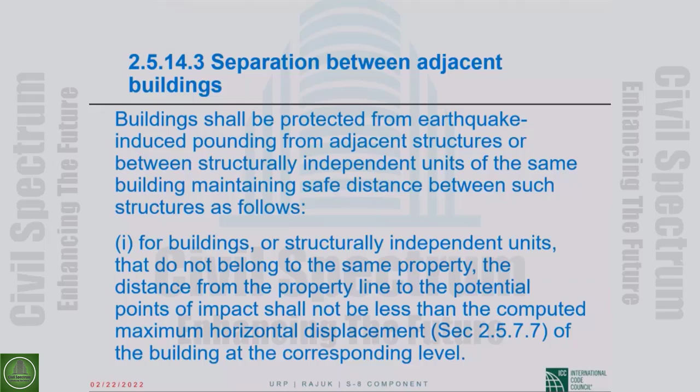The second item: for buildings or structurally independent units belonging to the same property, if the distance between them is not less than the square root of the sum of the squares of the computed maximum horizontal displacements of the two buildings or units at the corresponding level.

So this is exactly the same as ASCE 7-10. Separation distance is the square root of the sum of the squares of the deflection at the roof level of the shorter building and the deflection at the corresponding level of the taller building.

Now, this square root of the sum of the squares concept is in BNBC ahead of ASCE 7-10. I wanted you to see that. And once again, we are not talking about delta sub M1 of ASCE 7, including torsion. This is just the horizontal displacement. It may not include torsion.

Then there is what I found most interesting, and the reason I thought I had to show all of this to you, is item number 3. If the floor elevations of the building or independent unit under design are the same as those of the adjacent building or unit - please let me read that again - if the floor elevations of the building or independent unit under design are the same as those of the adjacent building or unit, the above referred minimum distance may be reduced by a factor of 0.7.

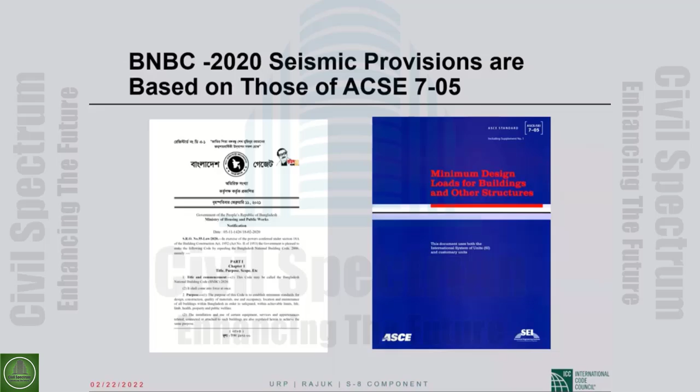Okay, so the documents in the background of our discussion are BNBC 2020, the seismic provisions of which are based on those of ASCE 7-05. You have heard this many times. Those are still in the background. Today, I do not know that I will need to go too many times to ASCE 7-10. But let's see, okay.

As I mentioned already, the non-structural components are in chapter 13, and non-building structures are addressed in chapter 15 of ASCE 7.

The non-structural components can be architectural, mechanical, or electrical. The architectural components are treated in section 13.5. The mechanical and electrical components are treated in 13.6.

Now these non-structural components could be a parapet, which would be an architectural component, or an elevator, which will be a mechanical component, or cables, electrical cables, which would be an electrical component. All of these things in the days of the Uniform Building Code used to be called parts and portions.

So everything to do with those has a subscript P in the old code for parts and portions. So we talk about I sub P for importance factor of parts and portions, or R sub P for response modification factor for parts and portions. In BNBC, the subscript is C for component, not P. Now, whether it was necessary to change that, I do not know what has been gained by that kind of a change. But this is something you need to catch on to if you're going to correlate the two documents.

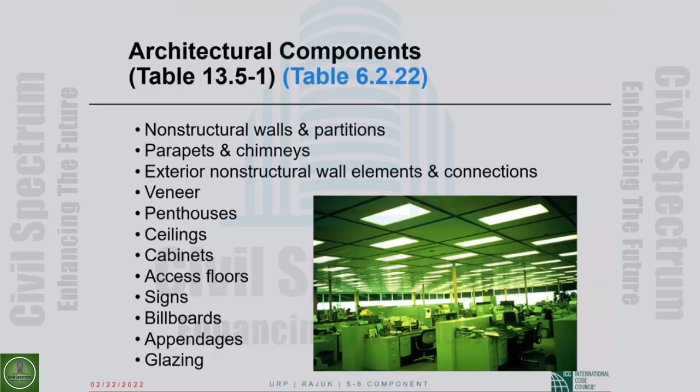Parapets and chimneys, these are roof-mounted chimneys. Exterior non-structural wall elements and connections, veneer, penthouses, ceilings, cabinets, if the cabinets are attached to the structure. Otherwise, it will be treated as furniture, and furniture is typically not considered a non-structural component. It is when they are attached to the structure or braced against the structure that we do consider them. Access floors, signs, billboards, appendages of various kinds, and glazing or glass, very important architectural components.

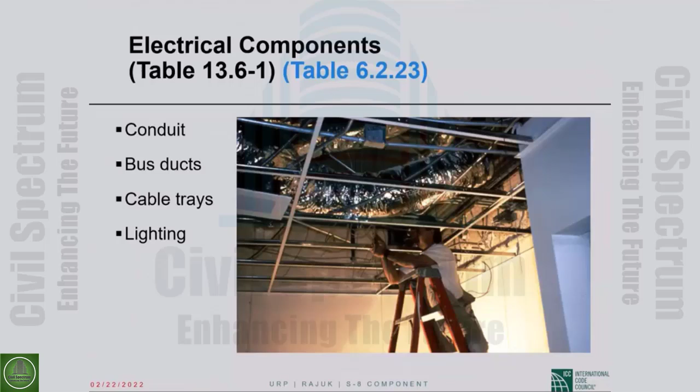Okay, for the purposes of this chapter, chapter 13 of ASCE 7, non-structural components shall be assigned to the same seismic design category as the structure that they occupy or to which they are attached. So very simple: the seismic design category of the non-structural components is the same as that of the structure.

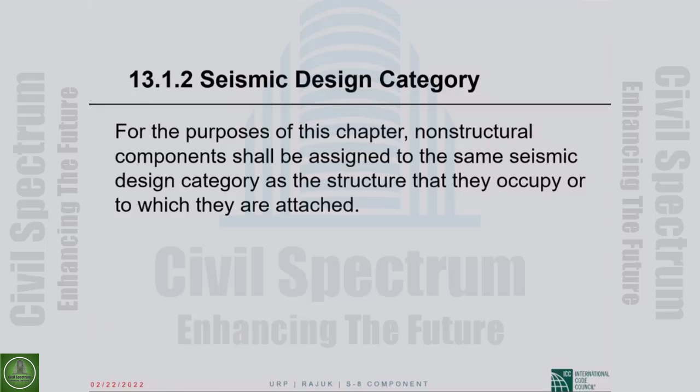Now, at the beginning of chapter 13 in ASCE 7, and the same is true in BNBC section 2.5.15, there are a number of exemptions. That's pretty much where the chapter starts, where the requirements do not apply. This is a very important list because it identifies the non-structural components that you need to design using chapter 13. This section establishes minimum design criteria for non-structural components that are permanently attached to structures.

So these are non-structural components permanently attached to the structures, not furniture as I said, and for the supports and attachments of those non-structural components. If they're attached to the structure, the attachment has to be designed.

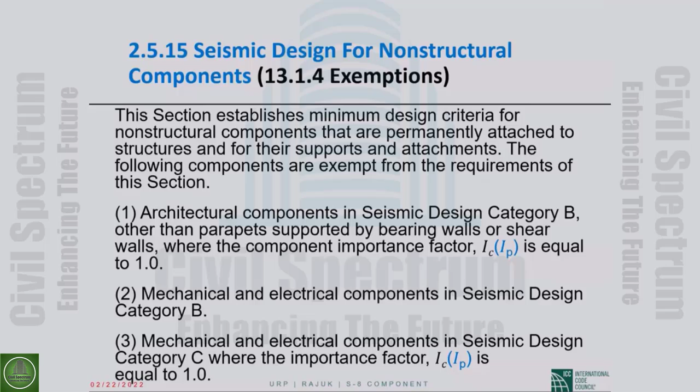Then mechanical and electrical components in design category B are exempt irrespective of I sub P. Mechanical and electrical components in design category C where I sub P is 1 are all exempt.

Continuing, mechanical and electrical components in design category D, where I sub P is equal to 1, and either flexible connections between the components and associated ductwork, piping, and conduit are provided, meaning the connections between the component and the pipes feeding into it are flexible, or the components are mounted at 4 feet or less above floor level and weigh 400 pounds or less. So this is equipment close to the floor, not very high up, not too heavy. If all of that is true, then even in design category D you can exempt them, provided I is equal to 1. We will take a look at where I sub P comes from and what I sub P of 1 actually means.

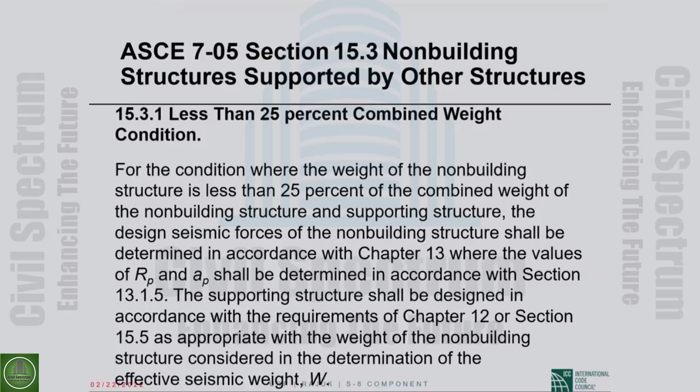Okay. Anyway, the rest of it may or may not be all that terribly important, and I will not take you through the case where the non-building structure weighs more than 25% of the combined weight.

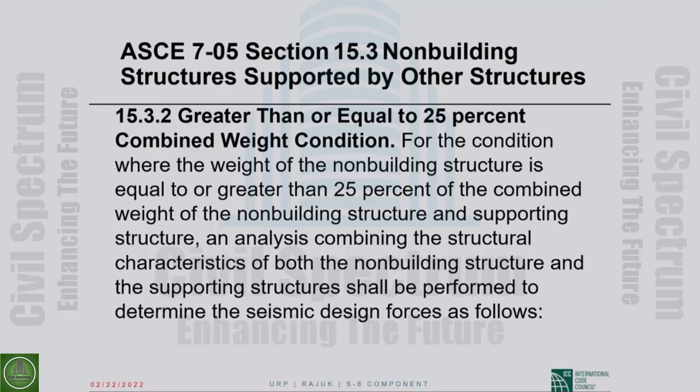Where the non-building structure weighs more than 25% of the combined weight, I won't take you through that, but there is a provision for it. Instead of the vague provision in BNBC 2020, ASCE 7 has very clear, distinct provisions for both non-structural components and non-building structures, and these are kind of interrelated.

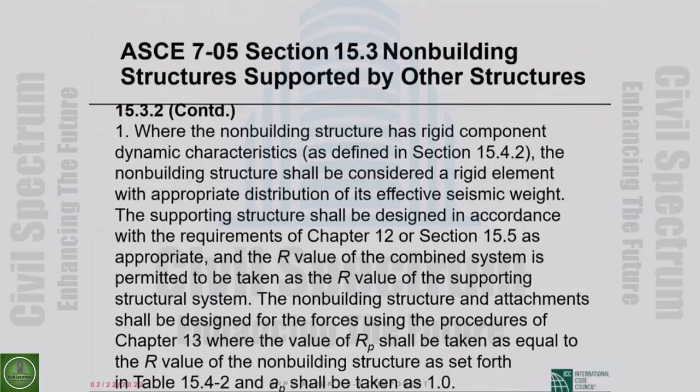I think that's probably enough on this topic. But the exemptions are very important, and what I just took you through is also important. You cannot start designing a non-structural component without figuring out if it is exempt, because then you'll be wasting time. You also cannot start running numbers until you've figured out some of the things we discussed, like whether the non-structural component is too heavy, in which case we may have to go to chapter 15 for design, not chapter 13. So with those things settled, let us get into chapter 13, the non-structural component design chapter.

If you consider the exemptions, what that leaves for us to design are: parapets in design category B, all parapets, and architectural components in design category B when I sub P is larger than 1. So in seismic design category B, the only architectural components that need to be designed by chapter 13 are parapets and architectural components with I sub P larger than 1.

If the design category is C, all architectural components must be designed by chapter 13. Electrical and mechanical components must be designed, but only if I sub P is larger than 1. Design categories D, E, and F: architectural, mechanical, electrical, basically all non-structural components shall always be designed by chapter 13. We say basically always because there were those exemptions 4 and 5, remember?

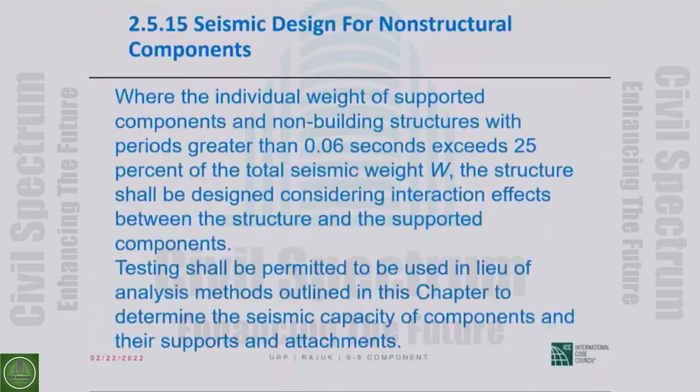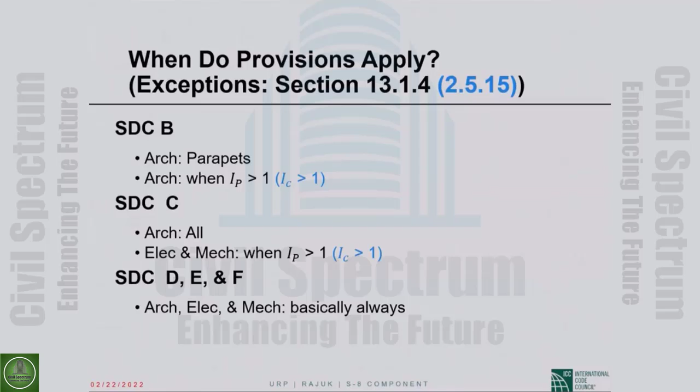These exemptions are there for the high seismic design categories, but those are not broad exceptions, they're fairly narrow. That's why we say basically always. So: design category B, parapets have to be designed using chapter 13, other architectural components provided I sub P is larger than 1. Design category C, all architectural components, electrical and mechanical only when I sub P is larger than 1. Design categories D, E, and F, basically all architectural, mechanical, and electrical components.

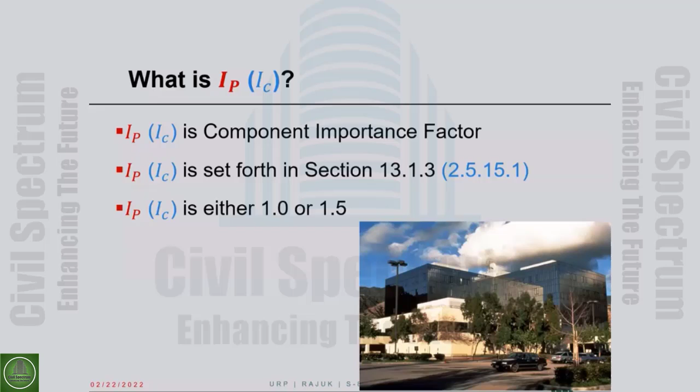Now, the I sub P that keeps coming up - as you've seen, it's very important. It dictates many times whether we have to design a component by chapter 13 or can forget about design. So I sub P is the component importance factor. It's given in section 13.1.3 of ASCE 7, and I've given you the corresponding BNBC section number. I sub P is either 1 or 1.5. I for the structure can have 3 values: 1, 1.25, or 1.5. I sub P for parts and portions has only 2 admissible values, 1 or 1.5. This is the section where you determine I sub P, the component importance factor.

The factor shall be taken as 1.5 if any of the following conditions apply: one, the component is required to function for fire safety purposes after an earthquake, including fire protection sprinkler systems - pretty clear cut. Two, the component contains hazardous materials which, when released, can do harm to the public. And three, the component is in or attached to an occupancy category 4 structure - essential facilities and hazardous facilities - and is needed for continued operation of the facility, or its failure could impair the continued operation of the facility.

So, I sub P shall be taken as 1.5 if any of those conditions apply. All other components shall be assigned an I sub P of 1. So I sub P is 1.5 when those conditions are met - it's not exactly an essential facility, but the component is needed for the continued functioning of a facility. The language is clear; otherwise, I sub P is equal to 1.

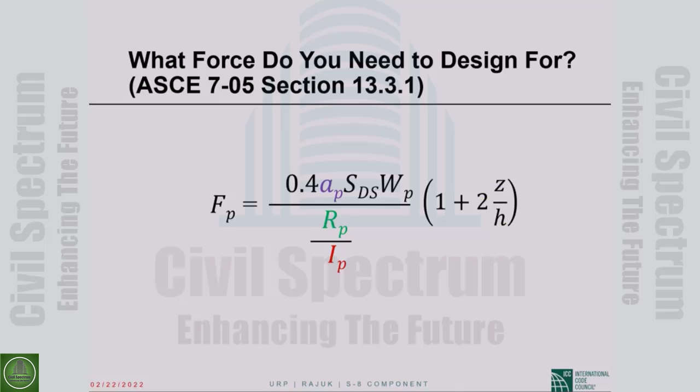Okay. In BNBC, this is your equation. F sub P is F sub C. This part is exactly the same. I sub C is I sub P, R sub C is R sub P, W sub C is W sub P. Anyway, so alpha sub C and A sub H.

Alpha sub C is the same as A sub P, the dynamic amplification factor. So A sub H takes the place of 0.4 S sub ds. That's what it boils down to. If you compare the two equations, alpha sub C is A sub P, W sub C is W sub P, I sub C is I sub P, R sub C is R sub P. And then 1 plus 2 Z over H is the same as in the ASCE7 formula. So this A sub H takes the place of 0.4 S sub ds.

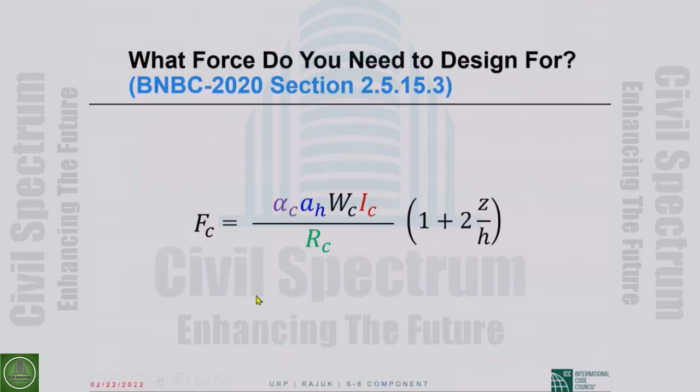And here I'm showing you that that is the case. A sub H, in fact, is equal to 40% of S sub ds. A sub H in BNBC is given by this expression, 2/3 Z times the soil factor S.

The soil factor S of BNBC is F sub A of ASCE7, and the Z is 40% of S sub S. Z is MCE level acceleration. This is why it is 40% of S sub S, not S sub ds. So 2/3 of Z, which is 40% of S sub S, times the soil factor S, which is the short period site coefficient F sub A, and all of that, 2/3 of S sub S times F sub A, is S sub ds. So A sub H is actually equal to 40% of S sub ds.

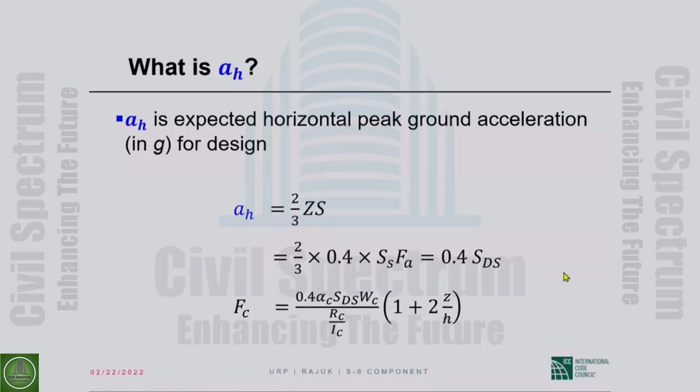So there is absolutely no difference between the BNBC formula and the ASCE7 formula, if you remember that alpha sub C is A sub P, and in all other cases, the subscript C is subscript P of ASCE7.

So what is A sub P? That's the dynamic amplification factor. It is given in table 13.5-1 for architectural components and table 13.6-1 for mechanical and electrical components. R sub P is given in those tables. A sub P is also given in those tables, 13.5-1 for architectural, 13.6-1 for mechanical and electrical.

A sub P is either 1 or 2.5, with just one exception, so that you know. There is either no dynamic amplification or there is significant dynamic amplification, 1 or 2.5 with one exception. I did not reproduce table 13.5-1; it is easy enough for you to look up. I think I gave you the corresponding BNBC table number.

Anyway, that's where it comes from, and it is 1 or 2.5. That's obviously important.

Okay, now we will discuss the variation along height that we, in a way, already discussed. So at the base of the structure, the peak acceleration is 40% of S sub ds. I said base of the structure, technically 40% of S sub ds is at the ground level. And base is a defined term in ASCE 7. This is where seismic forces are imparted to the structure. Seismic ground motion is imparted to the structure. This is how it is defined.

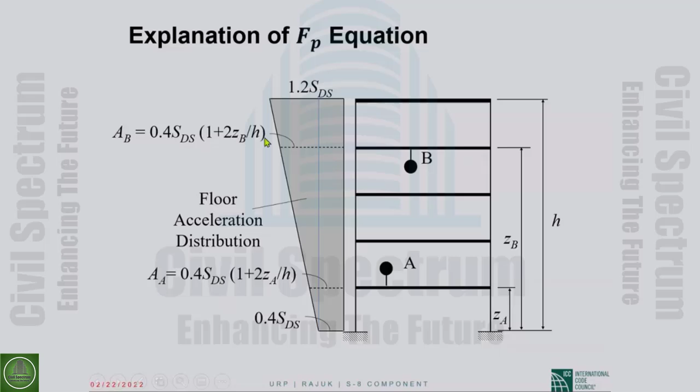At the roof level, we are considering 3 times as much acceleration, and in between it is a linear variation, and that is what is expressed by this expression. So for equipment, piece of equipment A, which is mounted at a height of Z sub A above the ground level, the component design force equals 1 plus 2 Z sub A over H. And for equipment B, mounted at Z sub B above ground level, this is the component design force, 1 plus 2 Z sub B by H. It's a linear variation in between the base and the roof.

Okay, so we discussed I sub P, the variation A sub P, and now the R sub P. That is about the only item in that equation that we have not discussed. It is the component response modification factor, as I have been calling it. This is also given in the same tables, 13.5-1 for architectural components, 13.6-1 for mechanical and electrical components. The corresponding BNBC table numbers are given. R sub P ranges between 1 and 12. Now 12, I think there is only one case that is kind of an outlier, but it is a pretty big range. It is not like A sub P, 1 or 2.5.

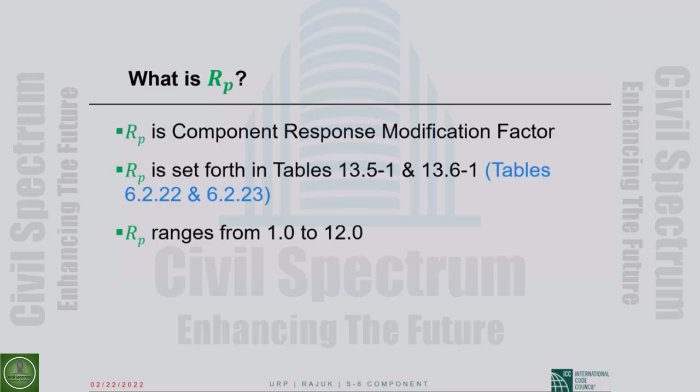Okay, so in those tables, the architectural, mechanical, electrical components that I showed you earlier in the 3 earlier slides are listed, and their A sub P and R sub P values are given.

Now ASCE tells you a couple of things that you need to understand and keep in mind, and the same language, or very similar language, is also in BNBC. The force F sub P shall be applied independently in at least 2 orthogonal horizontal directions, in combination with service loads associated with the component as appropriate.

That's what should be done. But when you are designing a parapet, it is the out-of-plane direction that counts. In plane, this F sub P will not do anything, it will basically have no consequence. It's a long thing, but I want to say that in principle, yes, in reality it may, depending upon what you are doing, not be necessary to apply the force in at least two orthogonal horizontal directions.

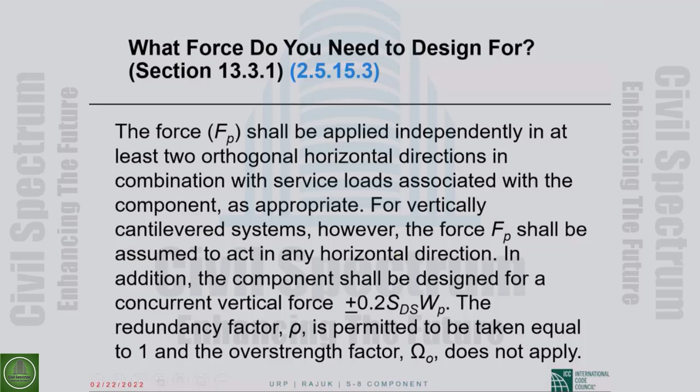The redundancy factor rho is permitted to be taken equal to 1, and the overstrength factor omega sub 0 does not apply. Read this and keep this in mind. What you are designing will dictate exactly how you implement that requirement.

Where non-seismic loads on non-structural components exceed F sub P, such loads shall govern the strength design. So let's say on a parapet you have out-of-plane wind, you have F sub P acting out of plane. The wind may very well govern in high wind areas, and you will design for the strength required for the wind, no question about it. So where non-seismic loads exceed F sub P, such loads govern the strength design, but the detailing requirements and limitations prescribed in this chapter shall still apply.

Okay, the strength will have to be whatever requires the strength, but if your seismic design category is high, it will still do the required detailing.

Okay, so component design force. I hope the requirements are clear. It's actually conceptually without any complication as far as I'm concerned.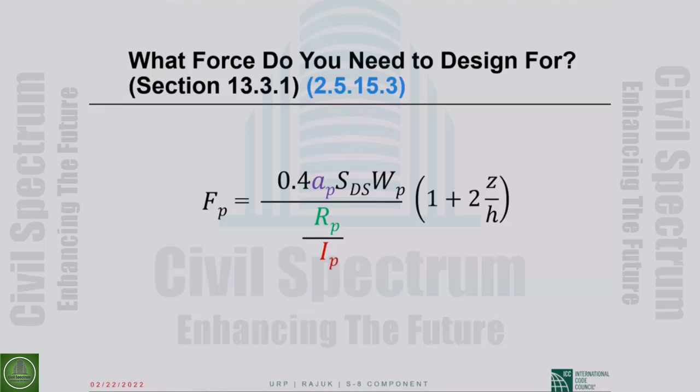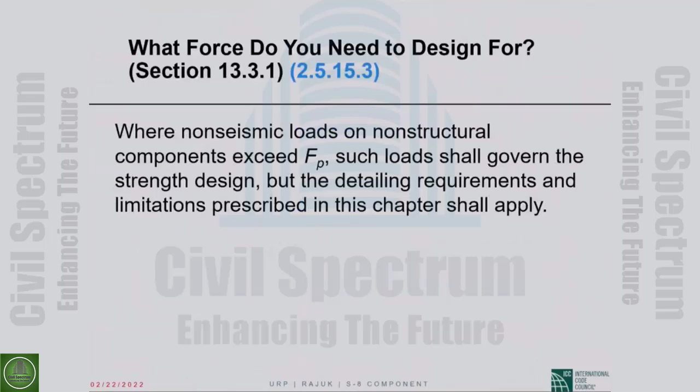Okay, so the equation makes basic sense. The A sub P and R sub P are given in tables, making it easy, and I sub P determination we have talked about. So there is not much else that is in ASCE 7 or BNBC. Now that is the force.

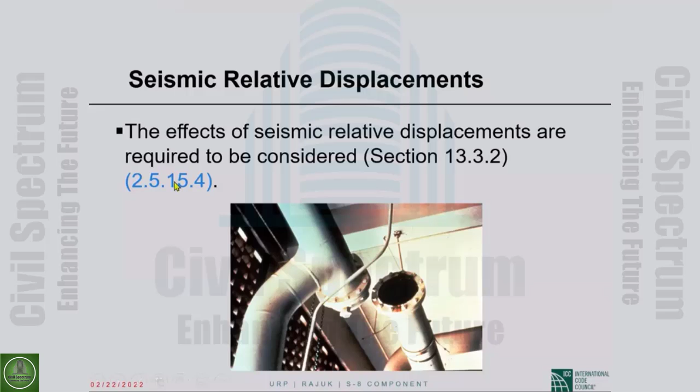There are some things like piping and so forth where the component design force is not important. What is important is seismic relative displacement that has to be accommodated by the piping or whatever we are designing. The effects of seismic relative displacements are required to be considered. That's what section 13.3.2 of ASCE 7 says, and there's a corresponding section number in BNBC.

So this is section 13.3.2: the effects of seismic relative displacements shall be considered in combination with displacements caused by other loads as appropriate. So it's not only seismic that may cause displacements; other loads may also, so we consider it in combination with displacements caused by other loads.

Seismic relative displacements, denoted D sub P, shall be determined in accordance with equations set forth. So equations are given for D sub P. This is very likely D sub C in BNBC. Okay, so please follow this.

So for two connection points on the same structure A, or the same structural system, with piping or whatever we are designing attached at two connection points, one at height h sub x and the other at height h sub y, D sub P shall be determined as delta sub x A minus delta sub y A. A is for the structure, so it is simply D sub P equals delta sub x minus delta sub y.

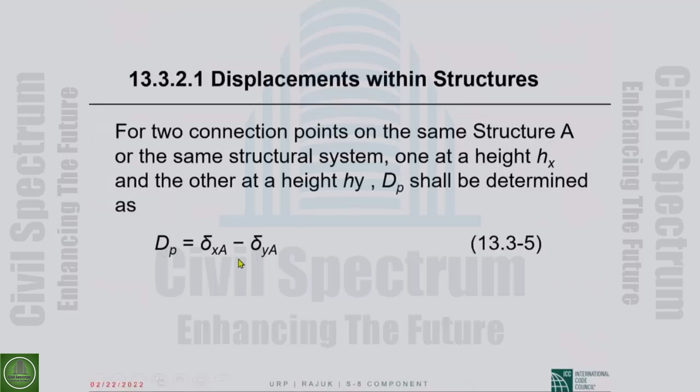That is for attachment to the same structure. For two connection points on separate structures A and B, one at a height h sub x and the other at a height h sub y, d sub p shall be determined as the absolute value of delta sub x, which is on structure A, and delta sub y, which is on structure B. So the attachment point at h sub x moves, and the attachment point at h sub y also moves. We take the horizontal movements and sum them up, using absolute values because the movement is in both directions.

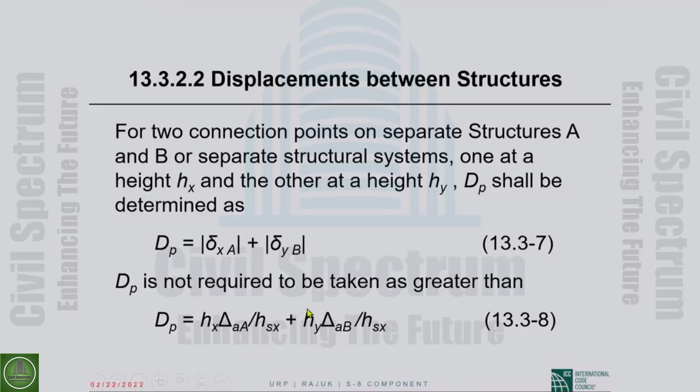This d sub p need not be any larger than, again, the deflection limit we allow, the allowable interstory drift, divided by the story height, multiplied by h sub x, where h sub x is the height to where the first attachment is. Similarly, we take delta sub aB, the allowable story drift of structure B, divided by the story height, multiplied by the height to the point where the second attachment point is. I think if you read this, it will be clearer than I was probably able to make it, but everything makes sense when you read it.

So a component has to be designed for the force that we looked at. Depending on the component, a more critical consideration may be that you will have to accommodate the relative displacement d sub p that we looked at. When you design glazing or glass, it is the relative displacement that becomes important. That has to be kept within tolerable limits given in ASCE 7. So whether the force or the displacement is more important depends on what it is that you are designing. And then the attachment of the non-structural component to the structure—that obviously is important. You have to design that attachment as well.

The section is 13.4 in ASCE 7, and 2.5.15.2 in BNBC. I took the first two lines from BNBC because it's simpler, and then ASCE 7 language, which is very similar to what you have in BNBC. Components shall be attached such that the component forces are transferred to the structure—very simple, conceptually and practically, that's what we have to do. Component attachments shall be bolted, welded, or otherwise positively fastened without consideration of frictional resistance produced by the effects of gravity. Friction due to gravity is not something we count on in seismic design. There are these days one exception, I would not go there, but from the beginning of seismic design we have not relied on friction caused by gravity for seismic resistance. A continuous load path of sufficient strength and stiffness between the component and the supporting structure shall be provided.

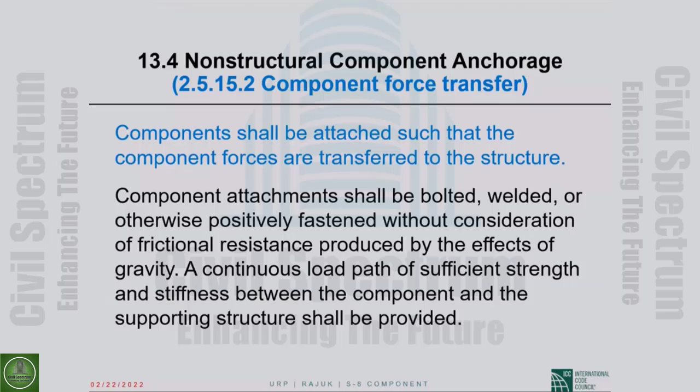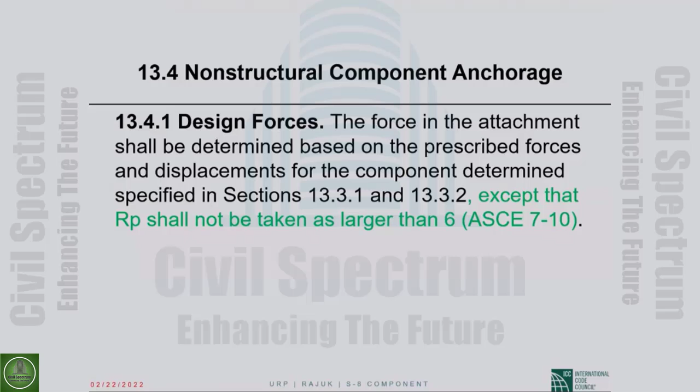This language is in ASCE 7-10 as well. ASCE 7-10 has added an exception that R sub P shall not be taken as larger than 6. So the force in the attachment shall be determined based on the prescribed forces and displacements for the component determined from earlier provisions, except that R sub P shall not be taken as larger than 6.

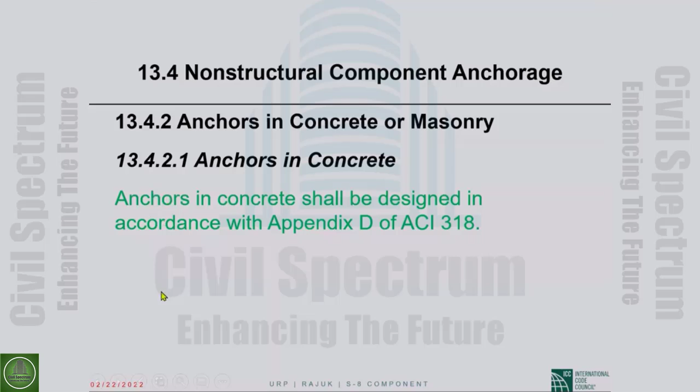This is a very, very important requirement when you attach a non-structural component to a structure. The anchors shall be designed using ACI 318 Appendix D, and that will give you ductile anchor failure. ACI insists on the steel failing rather than concrete in anchor design, and the steel failure has to be ductile failure. There are a couple of alternatives to that, but that kind of failure mode is very, very important. So this to me is an extremely important requirement, that the anchors must be designed by ACI 318.

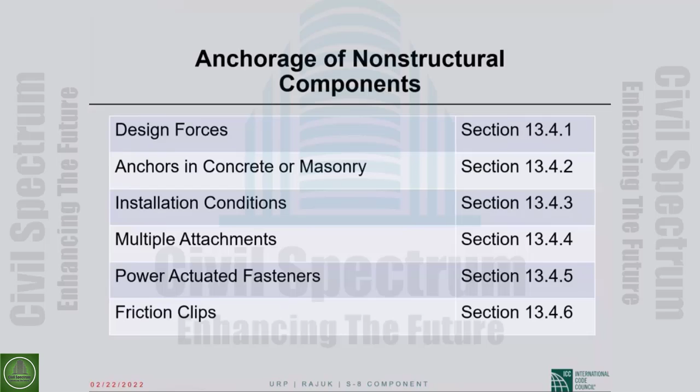Now, beyond anchor design forces for anchors in concrete or masonry, there are other provisions that you need to look at in ASCE 7: installation conditions, multiple attachments, power actuated fasteners, and even friction clips. There is good commentary on friction clips with a picture - good ASCE 7 commentary. So as far as anchorage of non-structural components, there is quite a bit said in ASCE 7-05.

In ASCE 7, a big item is special certification. I didn't quite find it in BNBC - that doesn't mean it is not there, I may not have found it. Special certification is required for many equipment. Anyway, let's look at this. Hospital equipment - a hospital will not buy equipment that does not have special certification on it. It's as simple as that. So this is a very important requirement of ASCE 7 that is adopted by the IBC and practiced across the United States.

So where in the code do you find special certification requirements? In ASCE 7-05, it is section 13.2.2. This is in the IBC as well. I went back to the 2009 IBC because that's more like BNBC 2020. And the section where you find special certification is 1708.4. Chapter 17 is on inspection and testing.

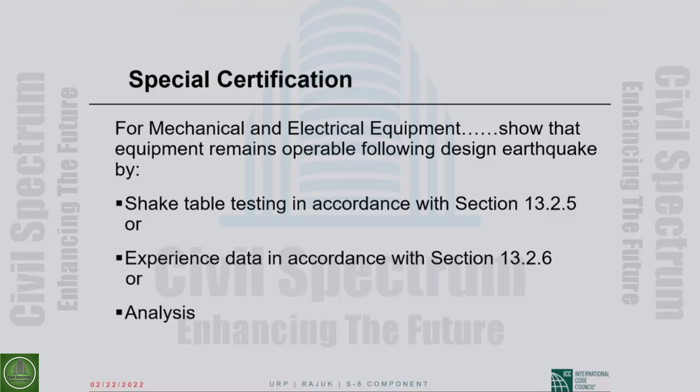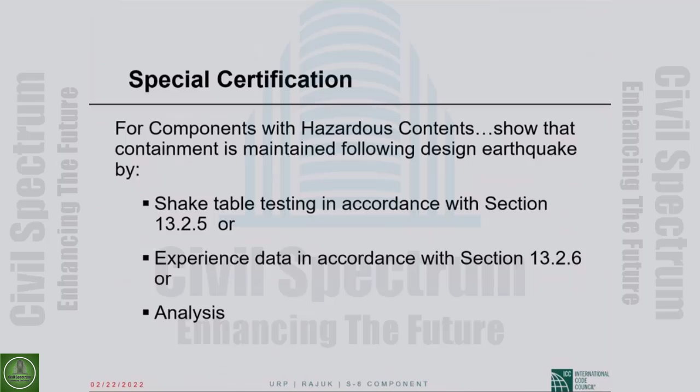For components with hazardous contents, show that containment is maintained - the material will remain contained following the design earthquake. And you shall also show this by shake-table testing or experience data or analysis.

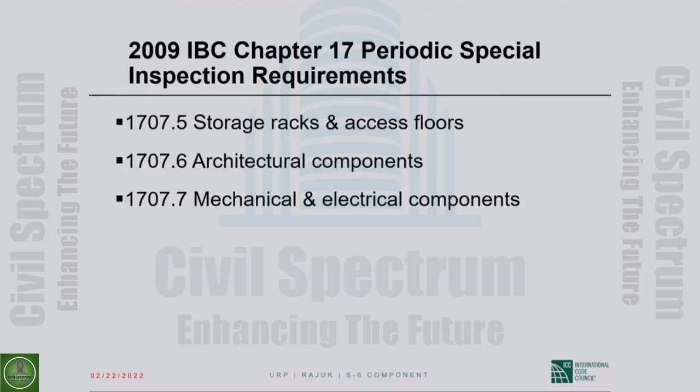On top of everything we discussed, IBC has special inspection requirements for some of this stuff. For storage racks and access floors, periodic special inspection is required. Periodic means from time to time, as opposed to continuous. For architectural components, also periodic special inspection. And mechanical and electrical components, periodic special inspection. I have given you IBC section numbers—those are 2009 IBC section numbers—so you can see what the requirements are. So it is a pretty comprehensive package.

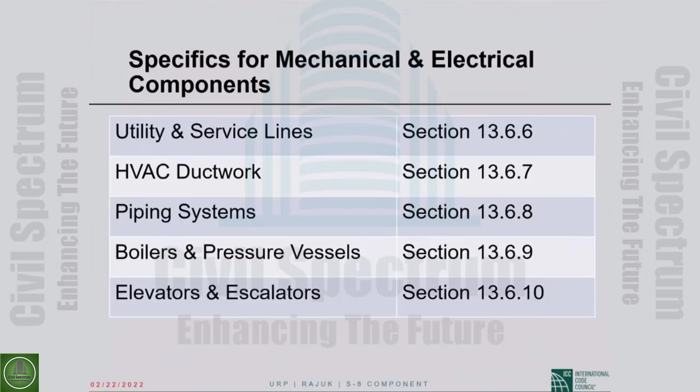Beyond the general requirements—the design force, the relative displacement, the tables giving us A sub P, R sub P—there are specific requirements for many non-structural components in chapter 13 of ASCE 7. Those things for which we have specific provisions are exterior walls and connections, glass, suspended ceilings, access floors, partitions. Those are all architectural components. Mechanical and electrical components for which we have specific provisions printed in ASCE 7-05 are utility and service lines, HVAC ductwork, piping systems, boilers and pressure vessels, elevators and escalators.

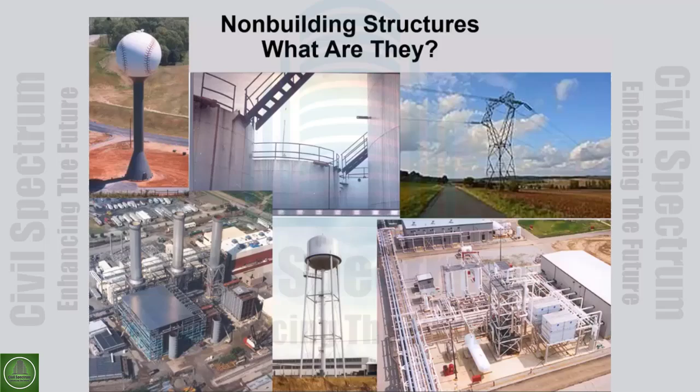It can be just a tank, one individual tank. It could be a transmission tower like that, or it could be an entire facility, an entire refinery. A refinery would have multiple non-building structures in it.

BNBC simply does not cover the non-building structures, important as they are. This is what is in BNBC 2020, section number 2.5.18: calculation of seismic design forces on non-building structures such as chimney, self-supported overhead water/fluid tank, silo, truss tower, storage tank, cooling tower, monument, and other structures not covered in section 2.5 shall be in accordance with chapter 15, seismic design requirements for non-building structures, minimum design loads for buildings and other structures.

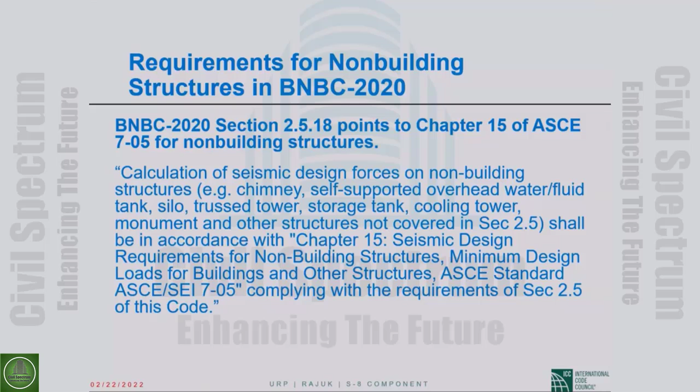So ASCE 7 chapter 15 is where you are being asked to go, okay, complying with the requirements of section 2.5 of this code. So when it comes to design, there is no difference between section 2.5 and ASCE 7 anyway. In other words, BNBC directs you to chapter 15 of ASCE 7.

ASCE 7-05 scope section—and I didn't put the section number here for some reason, I meant to, it's 11.1.1 if I recall correctly—the scope of the seismic provisions. So the section spells out the scope of the seismic provisions of ASCE 7, but then there are exceptions, things that are not covered by ASCE 7.

Exception 4 includes the items that I have listed: vehicular bridges, electrical transmission towers, hydraulic structures, buried utility lines, nuclear reactors. Those are all non-building structures, but they are not covered by ASCE 7-05. The electrical transmission tower is kind of illogical for ASCE 7 not to cover, but that is because of political reasons—the powerful interests didn't want ASCE 7 to cover them. Be that as it may, ASCE 7 tells you in black and white that those particular non-building structures—definitely including all bridges—are not covered by ASCE 7-05.

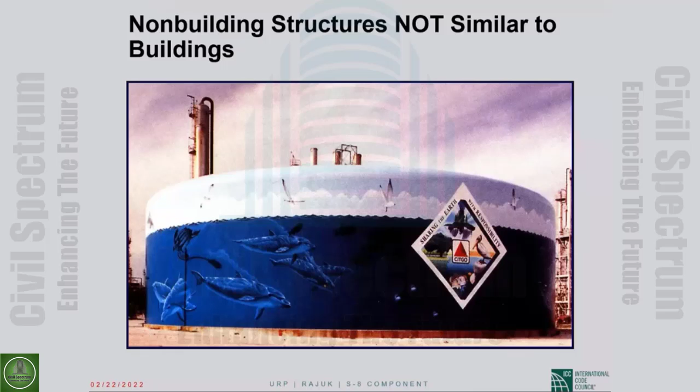The many water tanks or liquid retaining tanks that are all around us—typically, definitely from the outside, we wouldn't know what the seismic force resisting system is. And seismic forces may very well be resisted by systems that are not listed in table 12.2-1. So these are non-building structures not similar to buildings.

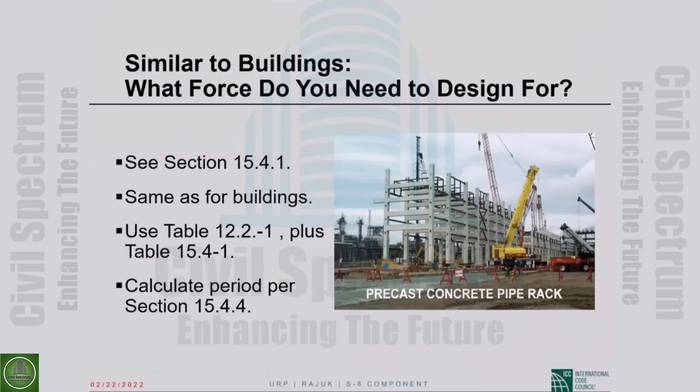Basically, non-building structures similar to buildings are treated like buildings for most practical purposes. We design them as we would design a building, with some modifications and additions that we will talk about, made in chapter 15.

Non-building structures not similar to buildings have specific provisions for many of them in chapter 15. And something like liquid retaining tanks, the provisions have, from the beginning...

It's difficult to pinpoint when the beginning was, but let us say the Uniform Building Code of the 80s had very little to nothing on non-structural components, non-building structures. So these are relatively recent. I would say started in the 90s, but then have really mushroomed.

And the tank provisions of chapter 15 of ASCE 7 occupy several pages, and those are sophisticated, like you wouldn't believe. Okay, so...

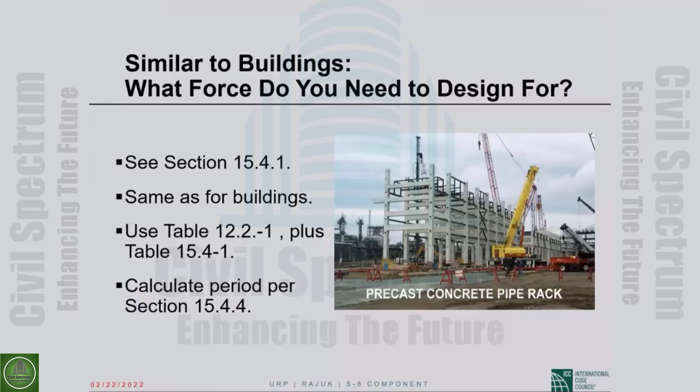Okay, now why did we say for R values, use table 12.2-1, but also table 15.4-1? In this table, that applies to non-building structures similar to buildings, we have done something that is not done anywhere else in ASCE 7.

There is a trade-off allowed between height limit and R value. Okay, let me try to explain. So the system here is ordinary steel concentrically braced frame—ordinary as opposed to special.

The usual R value is 3¼, omega sub 0 is 2, C sub D is 3¼, no height limit up to design category C, but then 35 feet only for design categories D and E, and not permitted in design category F.

Okay, now you can definitely use that line, but then you have to deal with a 35-foot height limit in design category D. That may not serve your purpose. So we are being offered two alternatives.

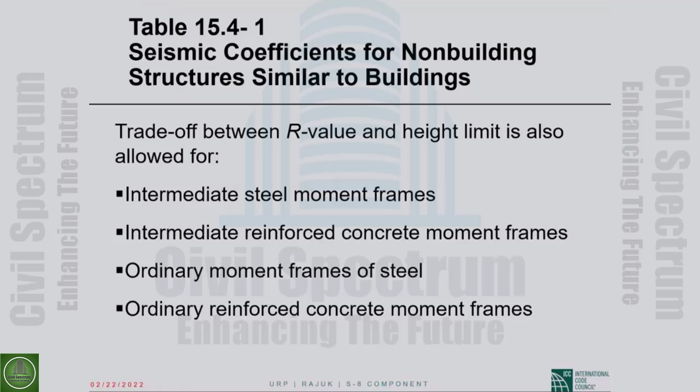Very interesting table. Interesting things are happening in there—this is for non-building structures similar to buildings.

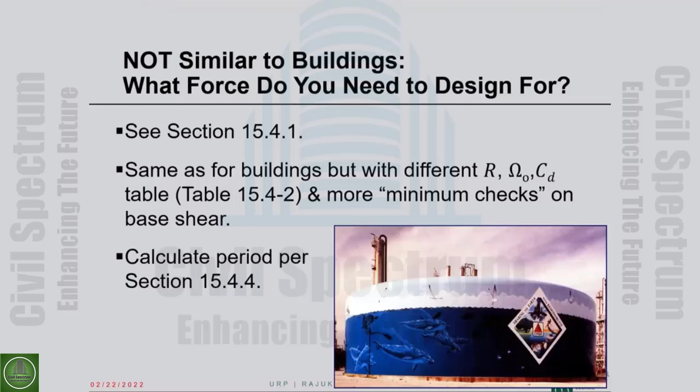So you still have to look at 15.4.1, where it directs you. The R, omega sub 0, and C sub D now come from table 15.4-2. The design base shear equations are the same, but the minimums are not the same, as I'll show you. And the period calculation is not the same as for buildings. Basically, you cannot use the approximate period formula that we use in building design. That is not allowed by chapter 15.

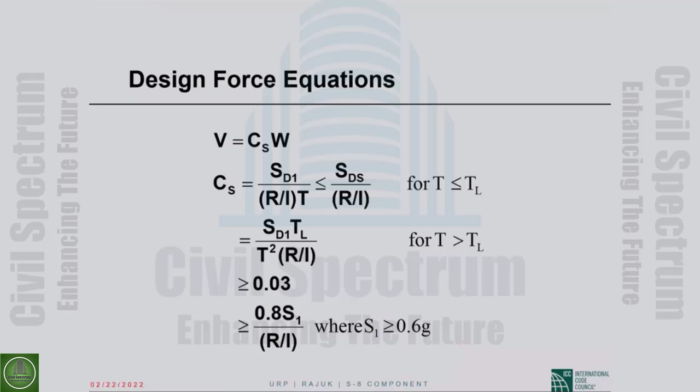Here it is 0.03—this is a much higher minimum. For non-building structures not similar to buildings, the minimum is much higher. And the near fault minimum, I don't remember exactly what it was, is also different here. This minimum applies only where the mapped long period quantity is larger than or equal to 60% of G, which is the rough equivalent of old UBC seismic zone 4.

For non-building structures, we use I, not I sub P. I is the importance factor. It is given in section 15.4.1.1, which references table 11.5-1, where the seismic importance factors are given for structures. I is either 1, 1¼, or 1½, as for building structures—no difference. This is not I sub P.

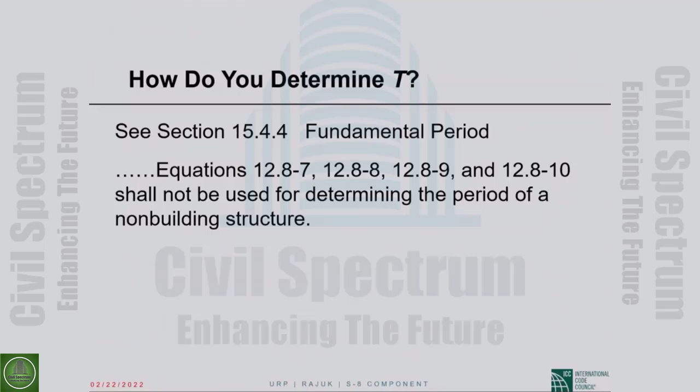Period computation—how do you determine T? The approximate period formulas do not apply. That's pretty much what this is saying. So this is the requirement for period determination for non-building structures. The fundamental period of the non-building structure shall be determined using the structural properties and deformation characteristics of the resisting elements in a properly substantiated analysis.

The eigenvalue analysis that we talked about involves stiffness assumptions as indicated in the relevant section. Alternatively, you can use the Rayleigh-Ritz formula.

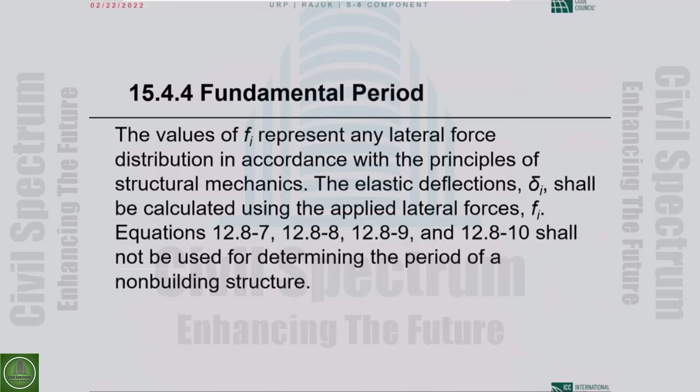Many of us are kind of familiar with this, and I don't think I showed you an example. Anyway, this is reasonably easy to use. The W sub I, delta sub I, and F sub I are explained here. The values of F sub I represent any lateral force distribution in accordance with the principles of structural mechanics. We typically take the design base shear distributed according to the code prescription, but you don't have to—it can be any lateral force distribution consistent with the principles of structural mechanics.

You shouldn't have a high force at the base and a low force at the top—that is not in keeping with the principles of mechanics. Anyway, the F sub I are the forces, delta sub I are the displacements obtained for those forces from elastic analysis, and what else was involved—F sub I, W sub I.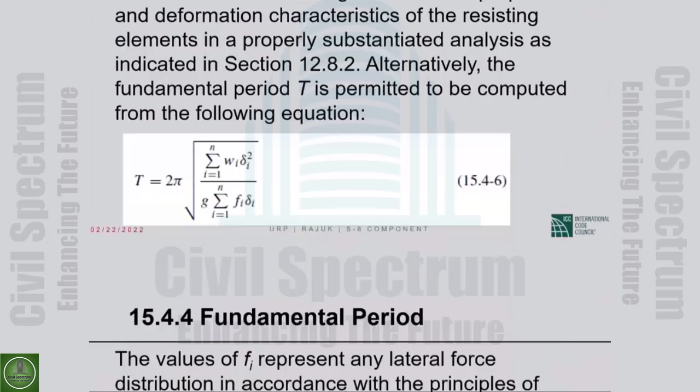W sub I are the seismic weights at the various floor levels. So, the main thing with this equation is that the approximate period formulas are not allowed. It has to be a rational period determination, which you can do on the computer using eigenvalue analysis, or if you want to do a simple hand calculation, you can use the Rayleigh-Ritz formula. When I say hand calculation, the delta sub I has to come out of analysis, but then you can find the period by basically manual calculation.

The particular non-building structures for which ASCE 7 chapter 15 gives provisions are pipe racks—these are all important, very important things—steel storage racks, electrical power generating facilities, towers supporting tanks and vessels, and piers and wharves that are accessible to the public. If those are private piers, then they are not covered by ASCE 7.

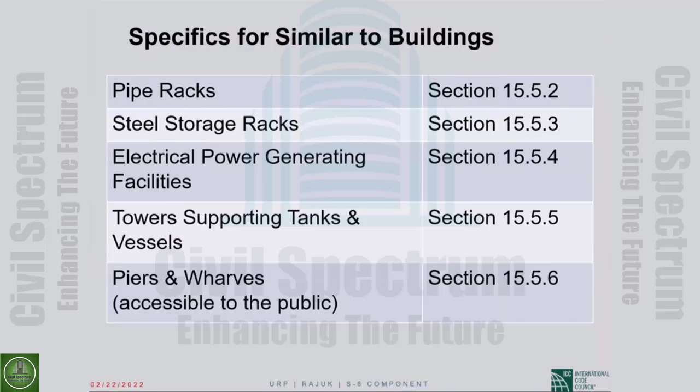This list is all similar to buildings. Pipe racks, steel storage racks, electrical power generating facilities - not all of them are necessarily similar to buildings, but those that are similar to buildings are covered. Towers supporting tanks and vessels, piers and wharves.

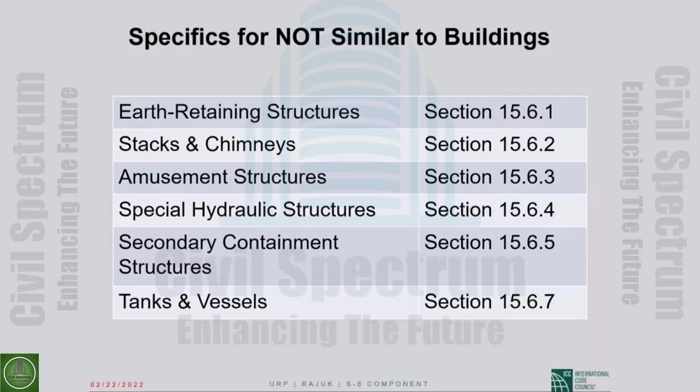Specific items covered in ASCE 7-05 that are not similar to buildings: earth retaining structures, stacks and chimneys, amusement structures, special hydraulic structures, secondary containment structures, tanks and vessels. That's the section I was telling you has grown to the point that I can't even believe.

Okay, there is a section on drift limitation for non-building structures. The drift limitations of section 12.12.1 for buildings need not apply to non-building structures if a rational analysis indicates they can be exceeded without adversely affecting structural stability or attached or interconnected components and elements such as walkways and piping.

Without adversely affecting attached or interconnected components and elements such as walkways and piping. If you can show that large deflections will not have an adverse impact on walkways and things, then the drift limit for buildings does not apply.

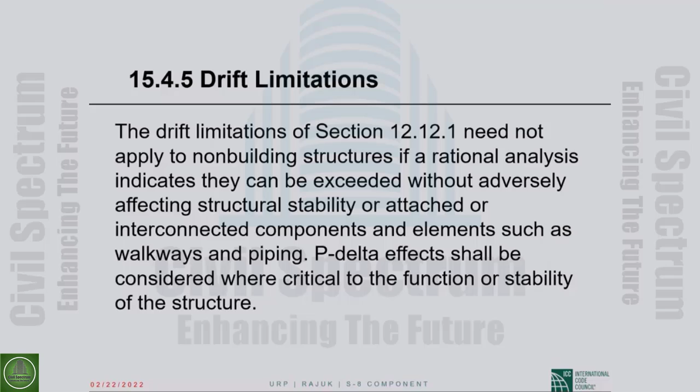P-delta effects shall be considered where critical to the function or stability of the structure. The final segment - this is not final, I have a little example at the back, which I probably should have put after the non-structural component section, but anyway, it doesn't matter. Let us look at this.

What is it? Non-structural component or non-building structure? Quite often, it's not that clear-cut. Susan Doughty, who worked with me for quite a while, wrote a paper some years ago with Bob Bachman, who is one of the authorities in this field. Much of what you see in ASCE 7-05 for non-structural components in particular are because of Bob. The two of them wrote a paper together, and the slides are basically out of that paper, to provide an idea to engineers on this important topic.

Non-structural component or non-building structure. Non-structural components covered by chapter 13 - the specific items are listed here, and there are a lot. Non-structural components on the left-hand side, non-building structures not similar to buildings are on the right-hand side circle. There is no question that these things - amusement structures, hoppers, monuments, silos, storage racks - these are non-building structures.

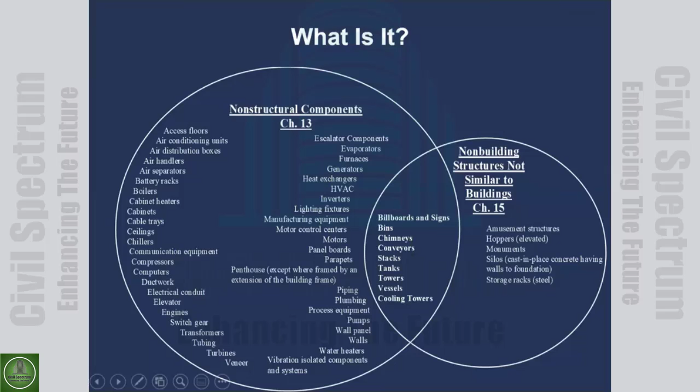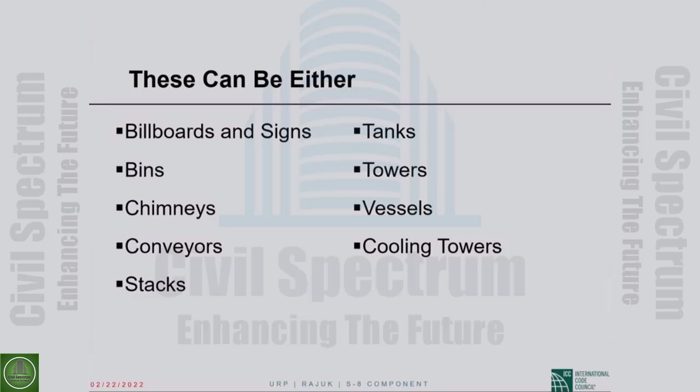The question is about this intersection: chimneys, conveyors. They can be non-structural components or non-building structures. So these can be either - billboards and signs, bins, chimneys, conveyors, stacks, tanks, towers, vessels, cooling towers. So what are some of the differences between non-building structures and non-structural components?

Susan thought that a warning should be issued to the viewers: what you are about to see is for guidance only. Generalizations have been made, and generalizations do not always apply. In applying these guidelines, or any guidelines actually, common sense is necessary. So these are definitely not hard and fast rules - just suggestions to set you on the right path.

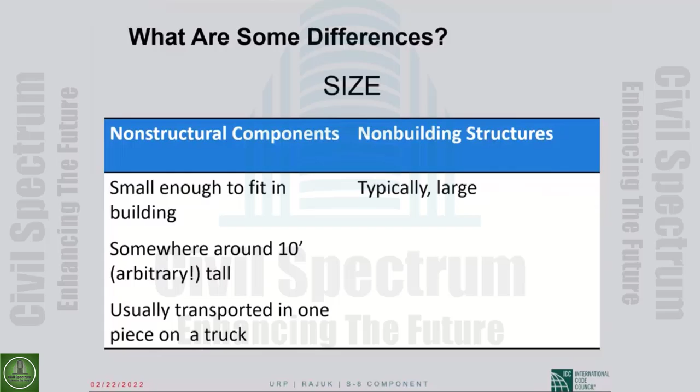So what are some of the differences based on size? Non-structural components are small enough to fit in a building, somewhere around 10 feet tall - the 10 feet is totally arbitrary - usually transported in one piece on a truck. Non-building structures are typically large, not always, but typically.

The designer always has the option of calculating both ways. You can take the same thing as a non-structural component designed by chapter 13, then redesign the same thing as a non-building structure by chapter 15, and take the more conservative answer. That is always a choice, though I do not know that too many people exercise this choice.

Going on with differences based on assembly location: a non-structural component usually requires no assembly at the job site, and its weight is likely small relative to the structure's weight. A non-building structure, on the other hand, is usually assembled at the job site, largely because of their size.

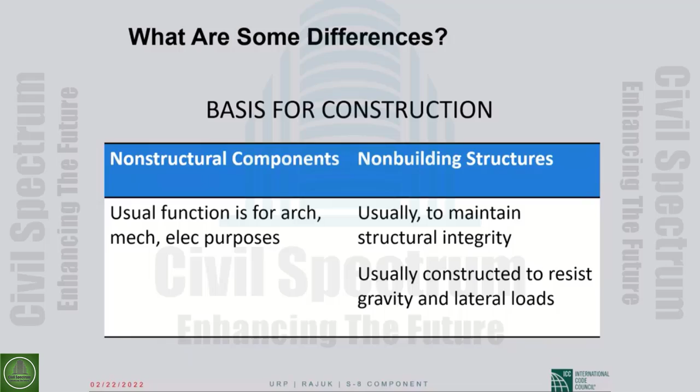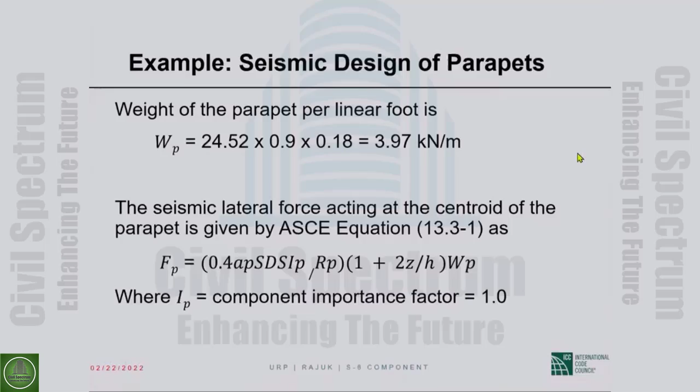No, I did not give you the other details. Okay, so accept that to be the weight, 3.97 kilonewtons per meter of this parapet.

The seismic lateral force, which would act at the centroid of the parapet, is given by the equation F sub P equal to 0.4 A sub P, S sub ds, I sub P divided by R sub P, times 1 plus 2z over h, times w sub P. You have looked at that equation a number of times. We will use that equation now.

Our I sub P is equal to 1. It's a parapet. It doesn't serve any essential purpose. S sub ds is 50% of g.

That is kind of part of the problem statement. W sub P, weight of the parapet, is a calculated value, although I didn't give you the details needed for the calculation. It's 3.97 kilonewton per meter.

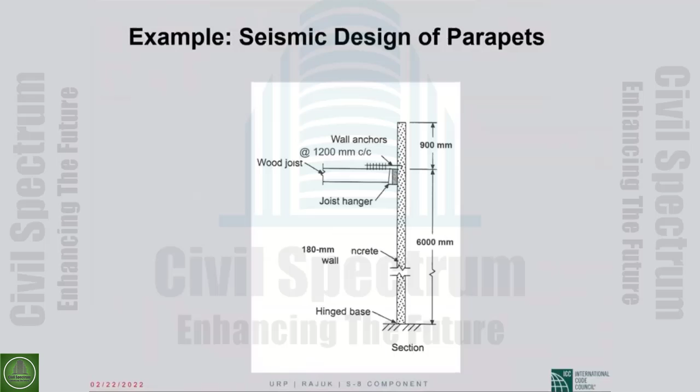The H, height of roof above the base, is 6 meters. That was given in the problem statement. This 6,000 millimeters here. Okay, so that is H.

And Z, remember, is height to the location where the component is attached. The parapet is attached to the structure at the roof level. So our Z is also equal to H, also equal to 6 meters.

This is like a roof-mounted equipment. The parapet is mounted on the roof or attached to the roof.

R sub P, component response modification factor. If you go to table 13.5-1, where we found A sub P of 2.5, the R sub P is also 2.5. So now we have everything that goes into this equation.

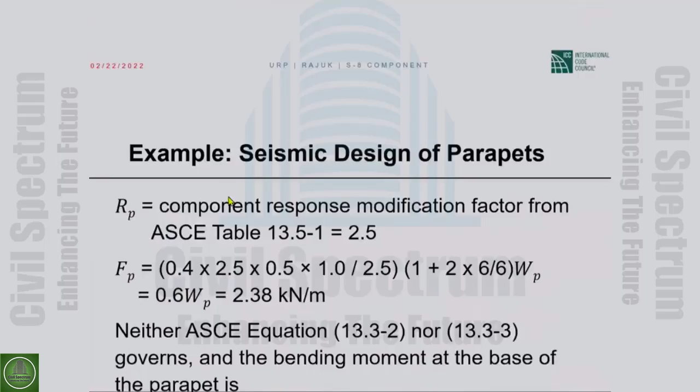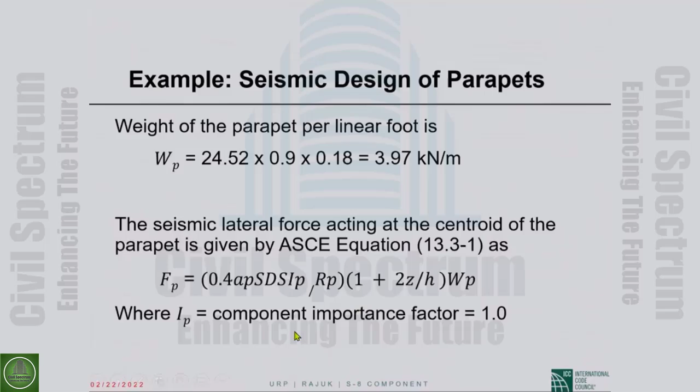0.4 times A sub P, S sub ds, I sub P. So 0.4, A sub P is 2.5, S sub ds is 0.5, I sub P is 1, divided by R sub P of 2.5, and then 1 plus 2 times Z over H. Z is 6 meters, H is 6 meters, times W sub P.

All of that gives us 60% of the weight. The weight we said is 3.97 kilonewton per meter. So 60% of that would be 2.38 kilonewton per meter.

There is a minimum on the F sub P below which you cannot go, and a maximum, remember, so those simply do not govern. So the governing F sub P is 2.38 kilonewton per meter.

This acts at the center of mass of the parapet, and the parapet is 900 millimeters tall. So the center of mass is half of that above the roof, 0.45 meter, times the 2.38 kilonewton per meter gives us 1.07 kilonewton meter of moment per meter length of the parapet. So for a 1 meter strip of the parapet, the bending moment at the roof level is 1.07 kilonewton meter.

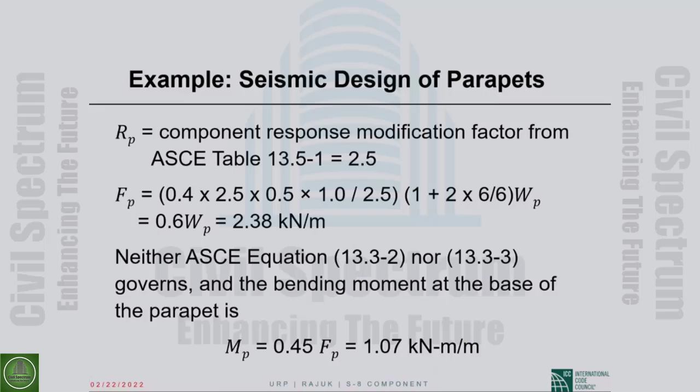It's a very simple example, but at the same time, I think it shows you application of the F sub P formula, which has multiple components in it.